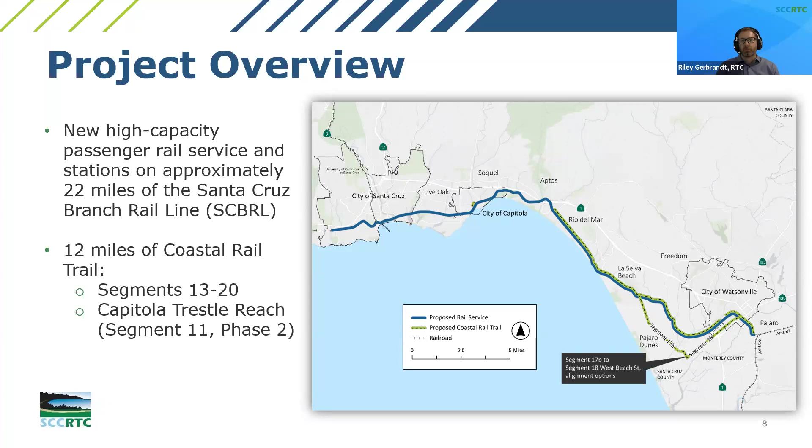So far we've been working on this project and coming to the community for the past about 18 months, working through what we call project milestones of the project concept report. The project has initially identified 4 major milestones, shown here on the screen.

The first milestone is the preliminary purpose and needs statement from winter of 2024, progressing through conceptual alignments and revised conceptual alignments, station locations, ridership approach, and vehicle types.

Now we're in milestone number 4, the draft project concept report, which includes all the information put together over the last 18 months, including ridership forecasts, preliminary cost estimates, and the next steps for project development.

In the coming weeks, we'll have the opportunity to review the project concept report itself. Later in the presentation, I'll show you the ways you can get engaged over the next several weeks.

We'll be providing information this evening on the station design for the Zero Emission Passenger Rail and Trail project. Thanks, Riley. My name is Paulo Faria. I'm a transportation architect at HDR, and I'm going to go through some of those concepts.

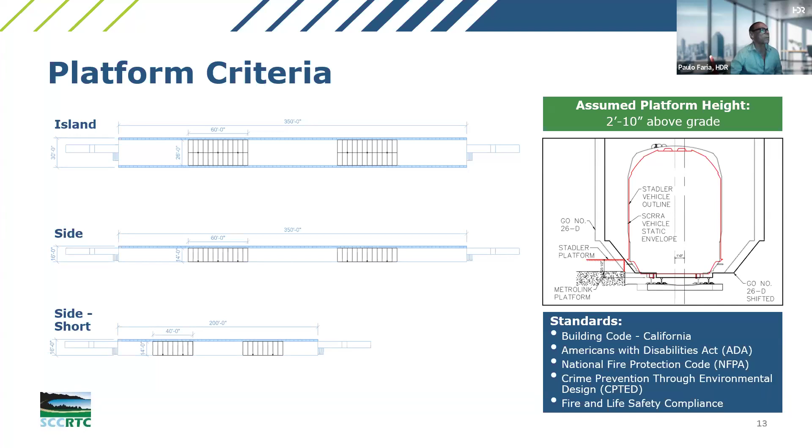I think what's important as well is that you don't think about the system as a series of stations. The system is really about a full journey experience, and that starts with your digital tool planning, and then as you approach the stations, they need to be visible, legible in the urban realm, sensitive to their context and contextual, but at the same time, things that can be read in the public realm and can be findable.

There is the experience of ticketing and validation. There is the waiting zone, the riding experience, the wayfinding as you leave the train, so you are oriented and have your mental map of where you want to go, and ultimately your connection to the destination, to area maps and system maps. So we're trying to orchestrate a whole experience and not just the station-to-station trip.

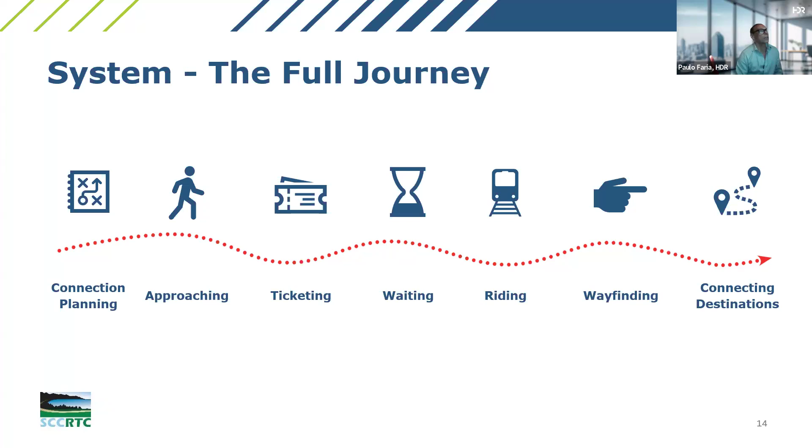We use some prototypical stations just to illustrate the thinking, because at this point we are not designing, but we are creating requirements for the future designers. So we have some prototypes that we developed just to illustrate the case.

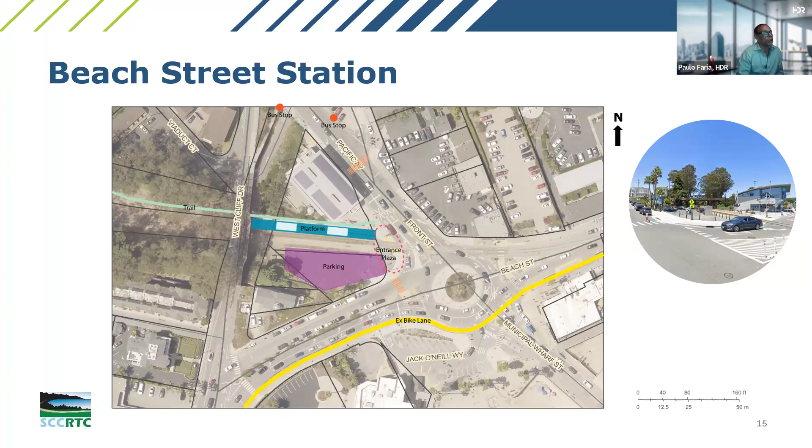Here it illustrates the idea of an entry plaza that engages the urban realm and is populated by a series of different elements. Number one, canopies that provide protection at the platform level. Number two, just indicative of the need, not necessarily the location, you need information: service advisories, real-time information, the system map, the connections map, and ticketing, whether by ticket vending machines or a manned station. This is an important part of the passenger journey.

A station signifier will make sure people see the station from a distance, hopefully better than gas station signs, something appropriate for the scale of the place but still visible to vehicles, pedestrians, and cyclists. A ramp and stair to the platform, since the platforms have to be elevated. Connection to parking when possible and when it makes sense.

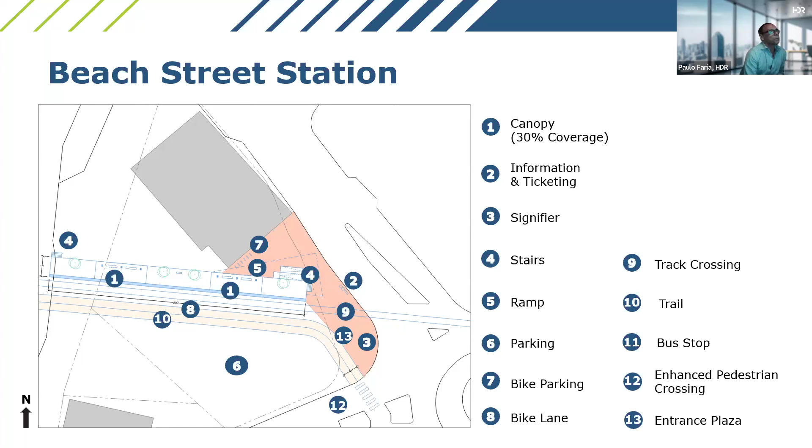A different station is the Capitola station. The beach station is end-loaded, so you enter the platform from one side only. We decided to exemplify Capitola because it's actually loaded from both sides of the platform. So you have a main entrance on the corner of Park Avenue and Bay Avenue that can be a kind of entry plaza, but you also need a connection mid-block on Park Avenue. This is important because it establishes the precedent of a primary entrance and a secondary entrance, making sure the primary entrance serves properly, and it's a matter of having the right of way.

So the primary entrance is the preferential one, really the one associated with the station identity, and the secondary entrance is secondary.

It's the same, but the difference here is that we had to duplicate certain elements like the station signifier, the ramps, and the information. You don't want people to have to walk the whole distance of the platform to be ticketed on the other side, so you're probably going to have to duplicate facilities like ticketing, information, and ticket validators, to get coverage at both ends of the platform and make it more balanced. Ultimately this just represents the duplication of elements that would happen only once in an end-loaded station.

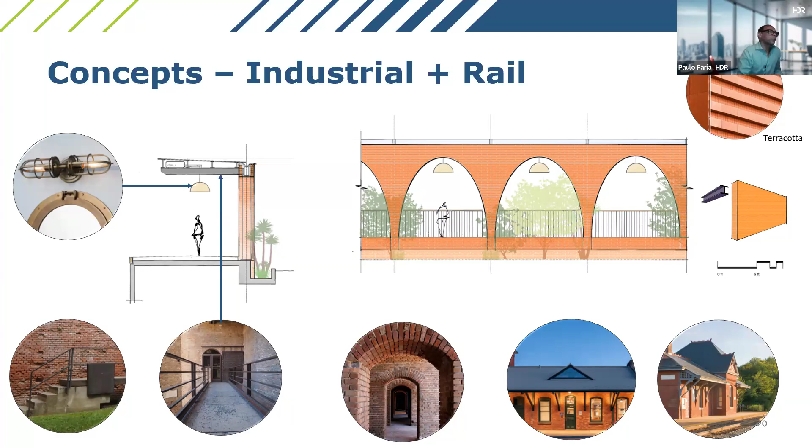It deals with the issue of predictability, because people will associate those structures across all the stations that have canopies. So the idea of an element that provides continuity, that's sensitive to different contexts and has some resonance with rail infrastructure, seemed plausible to us, and we'd be interested to hear your opinions about it.

This is an illustration of what this could be: black steel or dark steel with brick. It's something that goes well together, and we could tailor the furnishings like seating, information, signage, and lighting around it, so it looks cohesive and you don't have a lot of conduits exposed, integrating all the systems. It has an interesting relationship with the trail, whether the trail is adjacent or across the alignment.

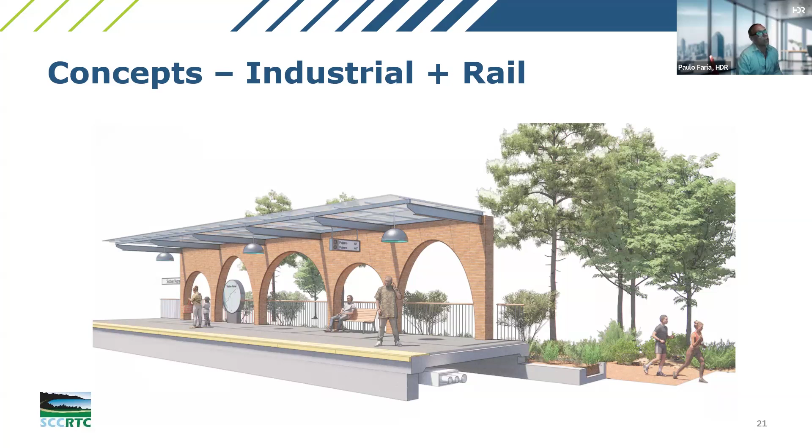Another conceptual idea was this concept of something lighter, like a canopy that's as minimal as it can be, made of steel and ETFE or fabric, exterior grade materials. This is an illustration of an ETFE pillow, or it could be a single sheet. The idea here is really to put your effort on the ground plane.

A series of moments where the ground plane comes up and down in a mosaic, and each station could have a different mosaic as part of an arts program. This idea of the ocean and the waves, the ground plane moving, with a very light functional canopy on top that's as minimal as possible.

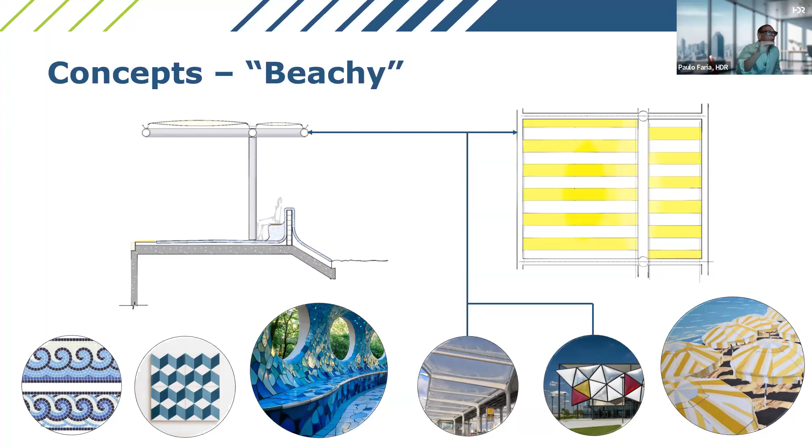I think this is the concept that requires more finesse. It's difficult to illustrate the sinuosity of the ground plane without incurring some gestures that don't make sense, so it's probably the most developed challenge. But the idea is a very light, fit-for-purpose, minimal canopy, with the ground plane incorporating mosaic and the opportunity for art.

I think public art is very important to differentiate station to station. Hopefully down the line an arts program can be implemented, taking this issue of consistency through all the stations with variability through the use of art or selective materiality and color.

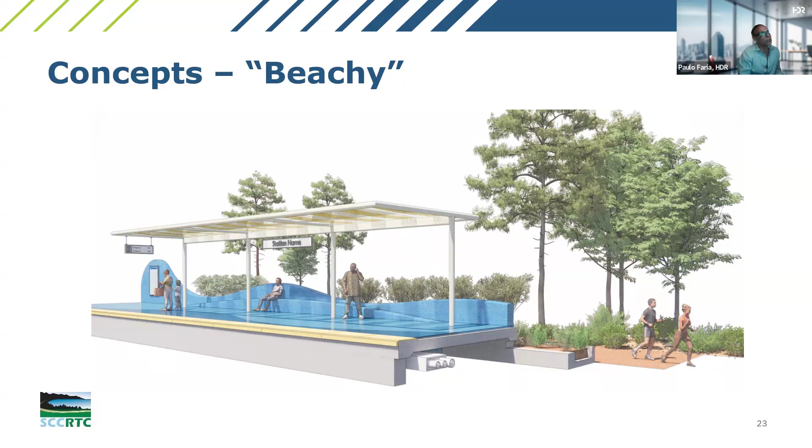Some of those things are interchangeable. In this option we thought maybe a brick floor, a ceramic kind of floor, could go well with that, but that doesn't mean other options couldn't have that too. We're testing options to ensure we capture the aspirations, and from a cost perspective, we're capturing what seems appropriate.

In this option we were thinking about a standing seam metal roof, but that doesn't mean we couldn't have a glazed roof or an ETFE roof. So those things are all interchangeable from the point of view of differentiating the options. We combine them with different elements, but they're all interchangeable.

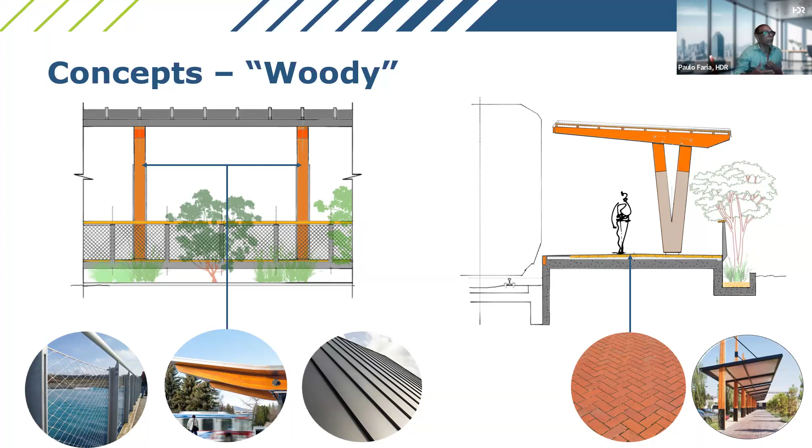Those are 3 flavors, and as I said, they can be combined differently. We didn't expect to be designing those, but we were just kind of teasing the opportunities for future designers, ensuring that we are covered from a scoping perspective for those different signage and wayfinding elements, furnishings, and aspirations of finishes, something that can be further designed in subsequent phases.

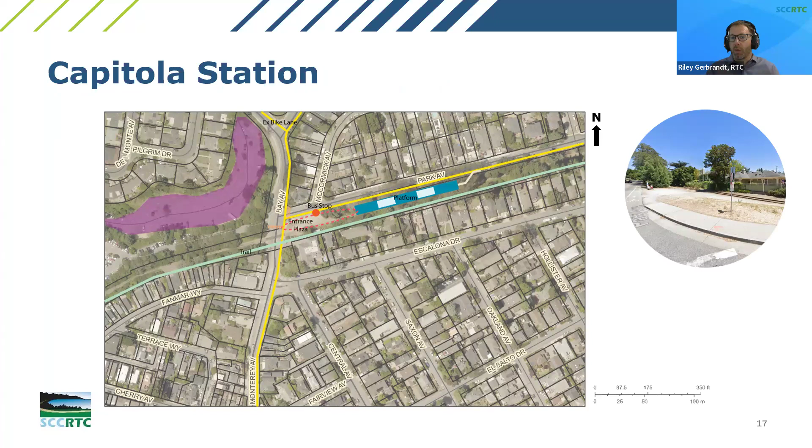So I will note that if you look at the Beach Street concept and the Capitola station concept - there's a question about where specifically that concept was located. The Capitola station concept is at the intersection of Bay Avenue and Park Avenue. But for both of the two concepts shown today, we've preliminarily set a 30% canopy coverage for both of those stations, and that's the percentage of the station that has cover.

Paulo, can you jump in and describe why at this level of design we would set a 30% target for the amount of canopies? Well, I think my answer to that is the climate. I think that 30% coverage normally varies from 20% to sometimes 50%. So this is the percentage of the area of the platform that is being covered.

The platform is dimensioned to fit a full train set with expandability and all that. You will not need on day one coverage, even if the ridership multiplies multiple times, you're not going to have to cover your full platform. So I think 30% is a good compromise between cost, practicality, usability, and day one need. That's the criteria we use for 30% of the area of the platform to be covered, for the purpose of where we are in the project.

Great, thanks Paulo. And you touched on two other things that I noted in the question queue. So Paulo, I'll be ready for this, I'll pose two more questions to you. One is - before I ask that one - you talked about expandability of the train sets and the size of the station.

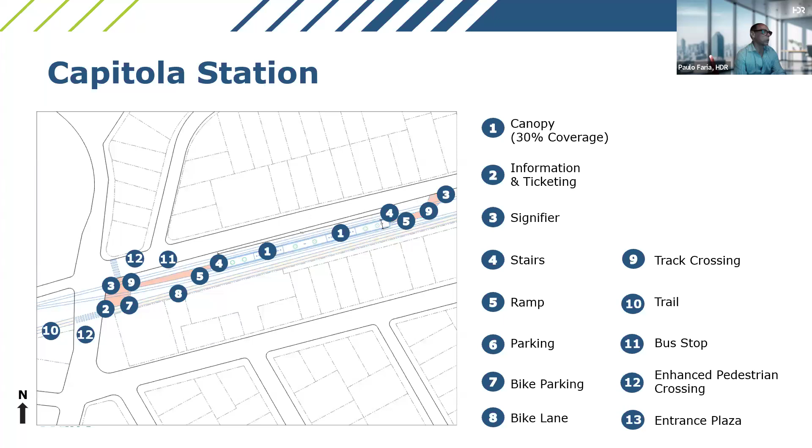Good answer. I wanted to comment that one of the things the trail projects have been considering is dark sky compliant lighting. To Paulo's point, what we might have considered for transit systems back in the 80s with fluorescent lights, lighting options have come a long way. There are actually some really good and effective lighting solutions that can be employed at stations that don't emit light pollution, and that can fit into the neighboring surroundings much better than they used to. Good questions. Tiffany, back to you.

Thanks. The next question has a few parts. The person comments that it would be nice to allow for different flavors depending on where the station is located, since the surroundings differ dramatically from one proposed station location to the next. An example would be a beachy ocean theme near the beach versus a more woodsy theme near forest locations. Also, the light design is nice, however, given the winter rain and windstorms, it would be wise to consider a segmented design for each station that is closable or can be somewhat more protected during inclement weather. The question also asks how the public and community can submit ideas on these station designs.

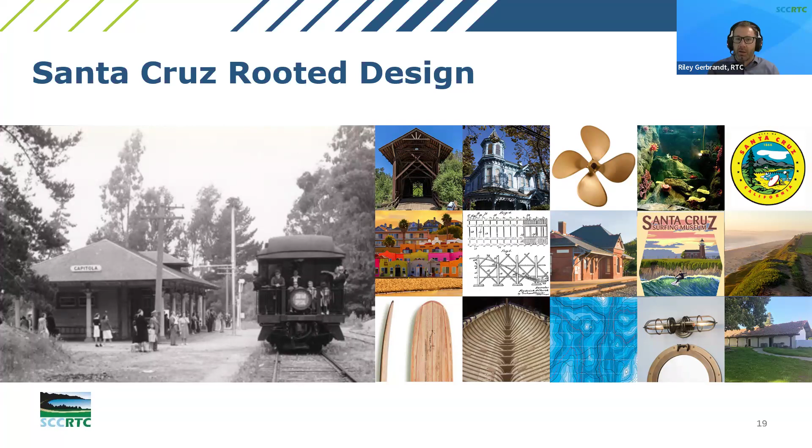So I do know that we're having a uniform platform height for the whole system, because of the train set that we're going to be using. We'll have to have a consistent station height across the whole system, so that we have level boarding at all the locations.

Paulo, do we have a particular station height that we're using in the concepts at this point? Yes, Mark, remind me, it's 2 foot something, 2'4", I think, that is above grade. Yeah, right when that question came up, I started drawing a blank. I actually believe, Riley, that what has been assumed is 30 inches above the top of rail, for that platform height. There is some variability in that as we go through vehicle design, but I think the design assumption at this point was 30.

Great. Yeah, and that's to allow level boarding, right? Correct. Yeah, yeah.

I think that will wrap us up for tonight. We're just at our end time here. I know that we didn't get to all of the questions tonight, but we are capturing all your questions and incorporating them into the work that the project team is doing through our Milestone 4 outreach. They do all get summarized and put into the Milestone 4 engagement summary memorandum that we put together. Usually we've been providing those at an RTC meeting that follows each of the milestones.